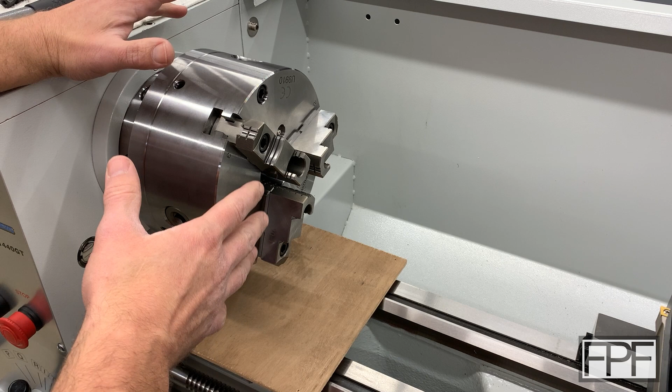And I need a 4-jaw chuck for the job I'm going to do on the lathe today. And I'm dreading changing the chuck out because every single time I've taken a chuck off this machine or put a chuck onto this machine, I have gently scratched the spindle nose on the lathe itself. You see, this chuck is interchangeable, and it aligns with the spindle on the lathe by a tapered nose on the spindle back here. There are 6 studs attached to the back plate of the chuck that go into bores on the spindle, and then there's cams that draw it in onto that taper.

The problem is those studs are really close to the taper, and it is really hard to line up all 6 and get this guy on there without touching the taper on the spindle. And the worst thing is that taper is what creates the precision between the lathe and the chuck. So scratching it up is not great.

Let me pull this off and I'll show you what I mean, because I think I have an idea of how we can fix this with a 3D print.

Okay, so I've got the chuck off and I set it here on a piece of plywood. Actually, I keep this plywood underneath the chuck when I'm putting a chuck on or taking a chuck off, so if I slip and drop it, hopefully it doesn't damage the bedway on the lathe.

And you can see now what I'm talking about. So here's those bores, there's 6 of these that these studs go into, and you can see this half moon shape is what these cams are turning and pulling this guy in on. But look how close they are to this taper. There's hardly any clearance at all between where the stud goes in and where the taper on the spindle is.

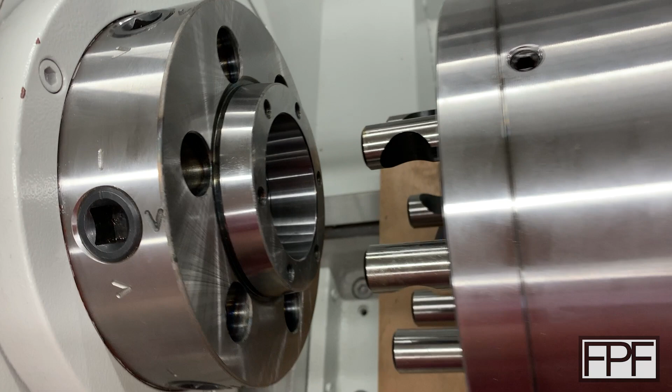In fact, in that very spot you can see some scratches that I've put there, hopefully. Yeah, I tried to stone it off with a precision ground stone, so there's nothing raised there anymore, so it should be okay. But you can see that's what's happening.

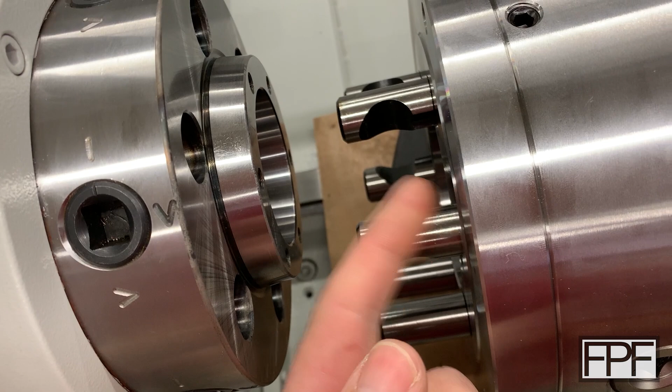And the scratch is right there where the hole is, because it's really hard to line up all these studs and get them into these bores without any of them touching the spindle. Because remember, they go all the way around, so it's not like I can be way high on one and then slowly come down into the bore. If I'm high, the ones at the bottom are going to contact the underside of the spindle taper.

So this wouldn't be so bad if the chuck wasn't really heavy, and this one actually isn't too bad, but the 4-jaw is incredibly heavy. In fact, let me go grab a scale. Let's weigh these chucks and see how heavy they are.

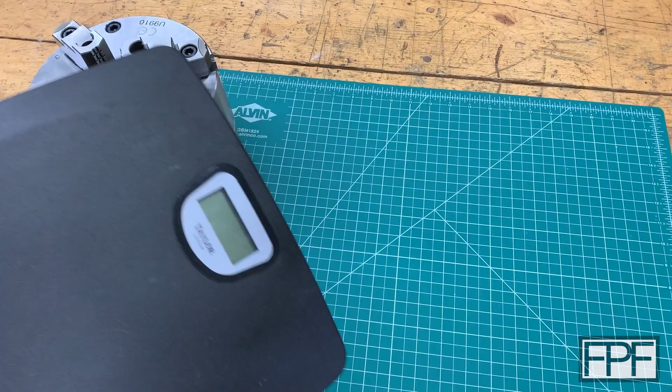All right, hopefully if I set the scale sideways here, you guys will be able to read the display, and I'll still be able to get something onto the scale. So this is the 3-jaw, an 8-inch chuck, and I don't think this one's too bad. It's still hard to hold steady up there. Okay, yeah, it weighs 47 pounds, so it's by no means light.

And I can lift 47 pounds, no problem. The problem is lifting it and holding it in a very precise fashion to get those studs into those bores without touching the spindle. The real challenge, though, is the 4-jaw.

Let's see what this guy weighs. All right, here's the big boy. This is the 10-inch 4-jaw. See if I can get that on there without blocking the screen. 68.4 pounds, so just shy of 70 pounds.

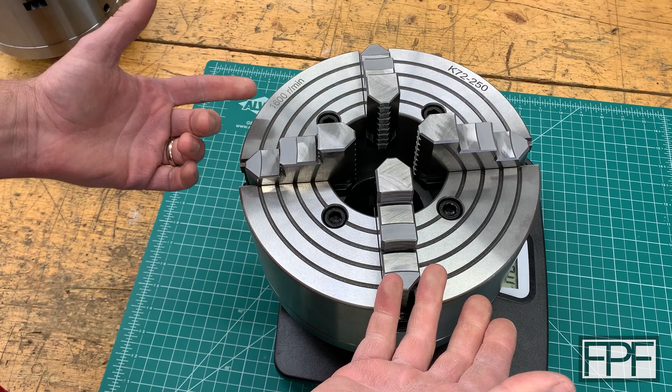And again, I can lift 70 pounds. I've gotten this on the lathe on and off 2-3 times now. The problem is holding it in a very precise location for an extended period of time. It takes like 10 seconds to get everything lined up and put in place, and then you still have to hold it. Even once it's in place, it's not going to stay there. It'll still fall out until you actually lock at least one of those cam lock studs.

So then you're trying to force it onto the spindle with your one hand, holding back that 70 pounds, and then trying to get one of the cam lock studs tightened with your left hand. God forbid you drop the wrench. Now you're taking this thing back off, lining it back up again.

It's a pain. I know a lot of shops, particularly on larger lathes, where it's not even remotely possible to lift the chuck and hold it in place to get it on there. They use an overhead crane or something like that.

I have a much simpler idea. I think we can make something that's going to line this chuck up precisely and make it a lot easier on the back to get these things on and off. Let's go back over to the lathe, I'll show you what I mean.

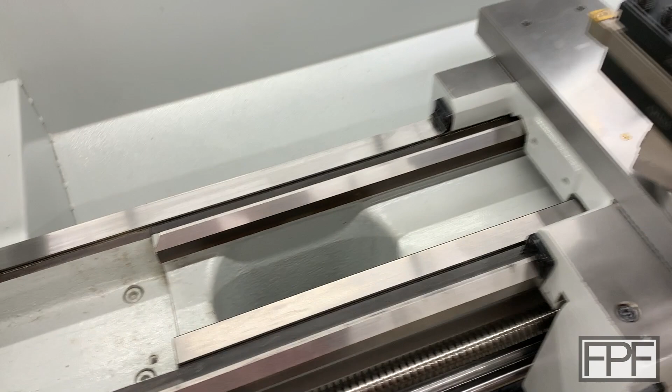Okay, so the lathe has these precision ground surfaces on it that the carriage rides on and that the tailstock rides on. If you notice, the tailstock uses the inner one, so this V here and this flat here, and the carriage uses a flat over here and a V out here.

What if we design and 3D print something that uses those same ways? So maybe this flat one back here, because these, by the way, the tailstock one does not go all the way. It stops shy of getting up here to where the chuck is going to go. So really that's out of the question, we can't use that.

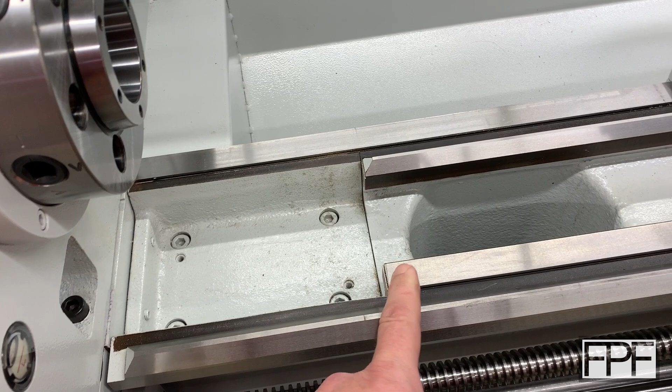But the other set of ways goes all the way to the headstock on this lathe. It does that because, I guess, if you're cutting really close to the spindle, maybe turning between centers, the carriage has got to be able to get all the way over there. So what if we use those?

What if we design something that slides on those, that is the perfect height to come over here, just set the chuck down onto, and then slide it into position? It's obviously got to be dead on, but I think we can get pretty darn accurate with a 3D print, even one this big.

I mean, this is going to be a big print. That's a fair amount of height between. Well, let me grab the tape measure, let's see what we're working with here. Maybe actually we can't do this. Let's check measurements first.

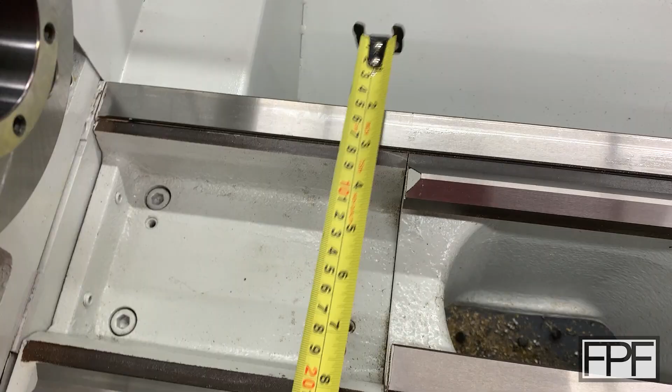Nah, we're good. We're well within the build volume of actually all of my 3D printers. This is going to need to be at least 7.5 inches across, or under 200 millimeters. So we're good, we're going to want to run a little bit past probably, but we're still good. And vertically, we're nowhere near running out of space.

So it's not like we need to actually go all the way to the center of the spindle, but even if we did, that would still fit.

So, all right, we're going to need a bunch of measurements to be able to make this even remotely precise. We need to know, in relation to the center of the spindle, exactly where this V sits and exactly where this flat sits, in at least two-dimensional space. Not necessarily three-dimensional space, but we need to know all of the distances to be able to relate these faces to the center line of this spindle to do this.

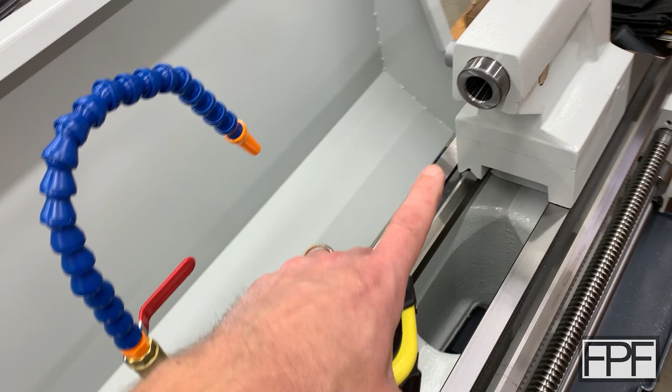And actually I think we can cheat a little bit, because the exact center of the tailstock should be the same as the center of the spindle. So we can put a pointed center here in the tailstock and probably take our measurements from that. Let me grab a center, I'll show you what I mean.

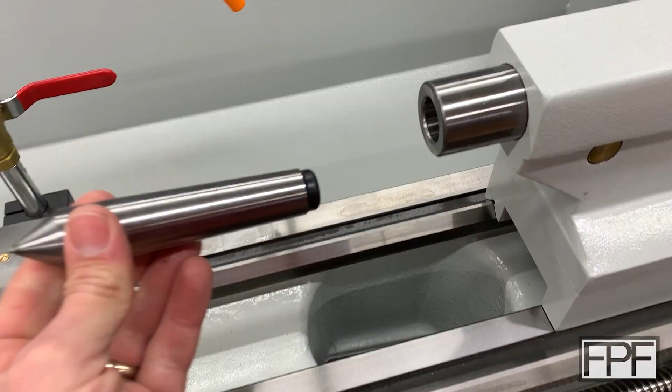Okay, yep, so now we can take all of our measurements on this end. It's going to be a lot easier to measure from this side. And we just need to figure out, this represents the center line of the spindle now, the point on the center. And we need to figure out what that is in relationship to all of these other surfaces.

And I think we'll draw all those in CAD and then build our design from that. Maybe do a test print to make sure that we are actually at the center point of the spindle first. So I'll spare you watching me take all these measurements, because I'm not even sure how I'm going to take all these measurements.

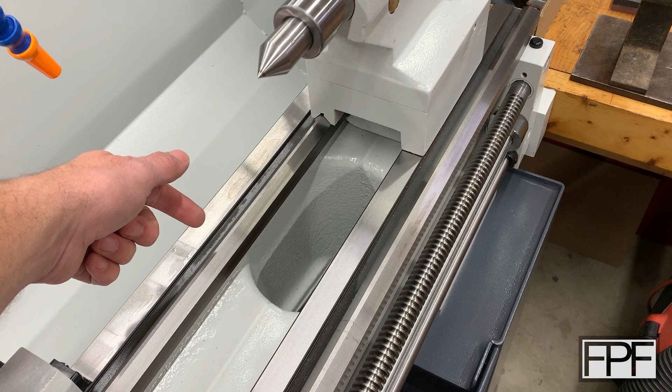Probably have to do some sort of precision block stack up from maybe the flat on the lathe, and same thing from the top of the V, maybe. There's a small flat here on the top of the V, and I just get the dimensions of the V from that flat. I'll figure it out and bring you guys back once I have all the measurements and get a start on this in CAD.

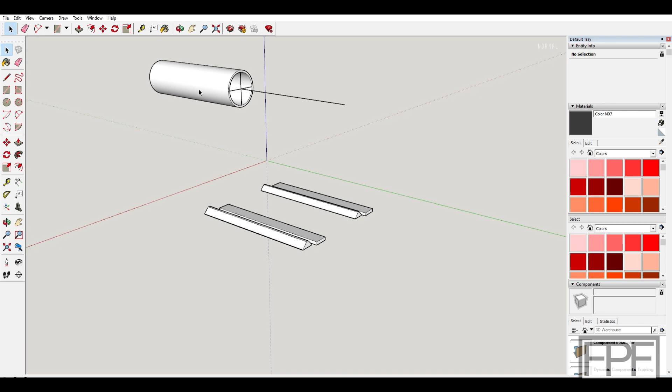All right guys, here's where I'm at with this. It probably doesn't look that impressive, but remember what we're trying to do at this point is establish the precise distance between the center line of the spindle on the lathe, and this is meant to represent the spindle. This line here on our green axis represents the center line of the spindle.

What we're trying to do is capture in a very precise way where each one of these precision ground faces is in relationship to the center line of that spindle. So I actually drew both sets of ways, both the inner one that the tailstock rides on and the outer one, because I used the ways in the center to establish some of the measurements and then measured from these faces to these other faces in at least one instance.

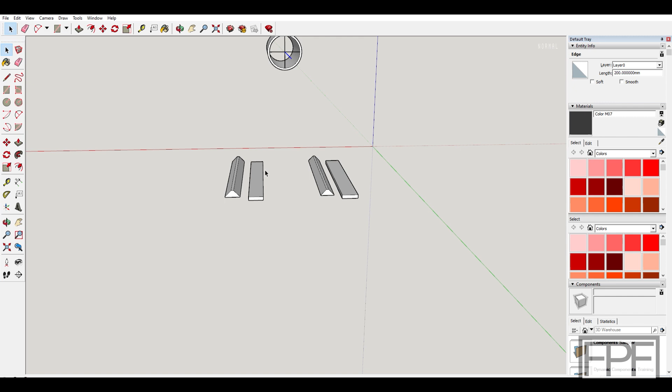I forget, kind of turned around here which way is which, but for one of these I had to stack blocks. Oh, I know what it was - I stacked blocks between the two flat surfaces, measured from the edges of these to get their position in relationship to the center line of the spindle, and then just took a set of calipers and measured from the edge, like this edge face here, over to the edge face on our V-way.

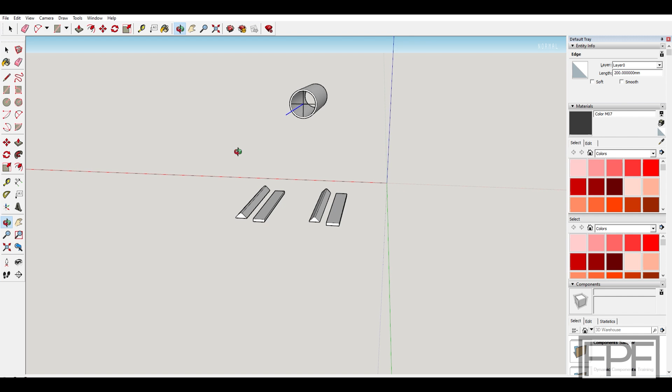And then I measured with a piece running across the top what the height difference was between the flat on the V-way and the flat face of the flat portions of our ways. So at this point, I'm confident that it is at least as good here in CAD as I measured it, but I think the next thing to do is actually print a test piece and just kind of see where we land.

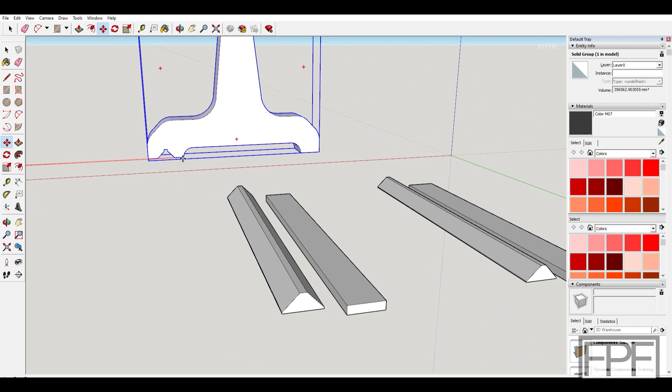So if I unhide here, I've got a test piece, and I will bring this over. Let's see if I grab onto this piece down here and bring this over so I can give you guys an idea of what I hope we're going to be able to do. I'm going to print this, and then I want to be able to bring it over to the lathe - it's not exactly on there, but you guys get the idea.

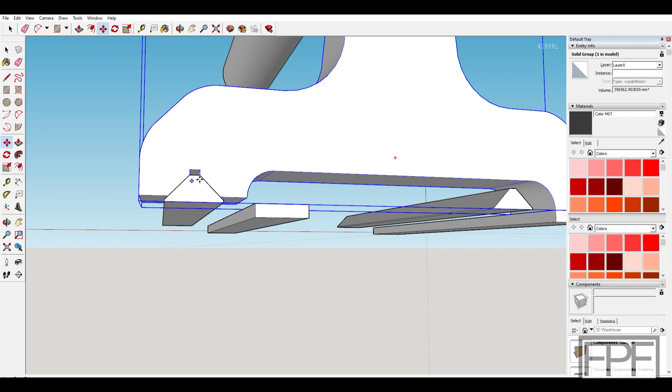This piece should sit on this V-way, and I have a notch up here in the top just to make sure that we are not contacting on that top face at all, which is going to throw off our measurement, because we want this to rest on the faces of this V, and then our flat on this way over here. And I've got clearance to make sure that we don't touch this V-way here.

And if we're dead on, we should be able to bring this small hole up here in our test piece over to the center line of the lathe, and it should line up perfectly. So I am going to print this test piece, and you guys will see me back at the lathe.

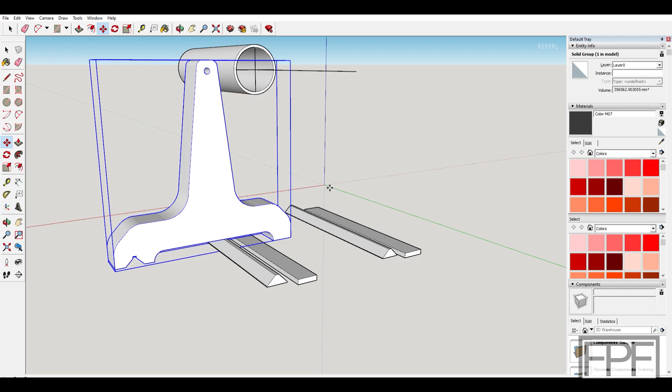All right, and here is our test piece fresh off the printer. Let's see how we did. Got that backwards - we need the V on this side. Let's see, does it even fit on here first? Yeah, that looks good. Probably should have gone a little bit taller with this because it's kind of rocking around a little bit.

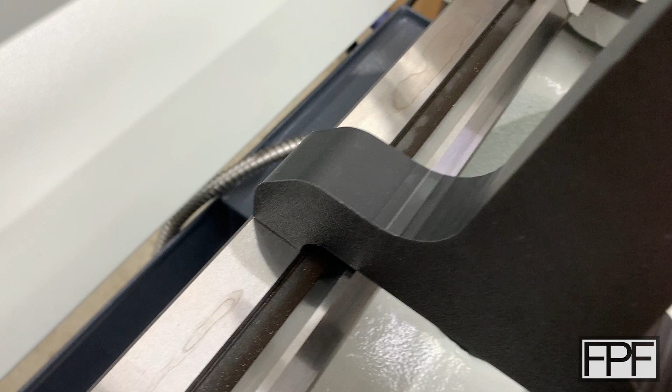If I push down on it, it seats on the - yeah, there we go. As long as I keep downward pressure, it stays seated on that V-way. And we look like we're pretty close in the back, but this is what matters up here.

We are either dead on or we are really close. I've got it cranked up until I made contact, and I'm just trying to look around from every side. I don't actually see, we might have a tiniest little bit of gap on that side. I think everywhere else, it looks like we're touching.

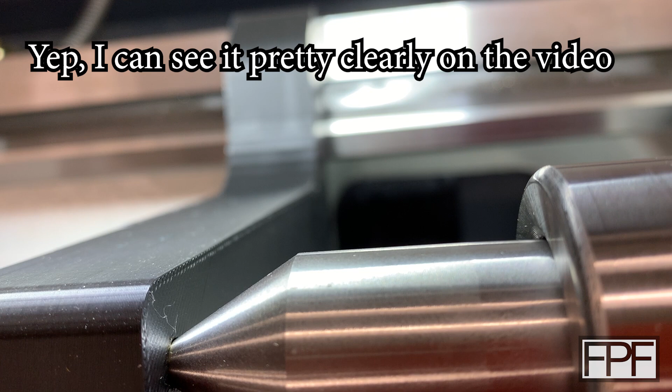Yeah, top to bottom, I would say we're definitely good. There might be the tiniest gap on that side. I think we have probably maybe 0.02 to come over in that direction, and we're dead on.

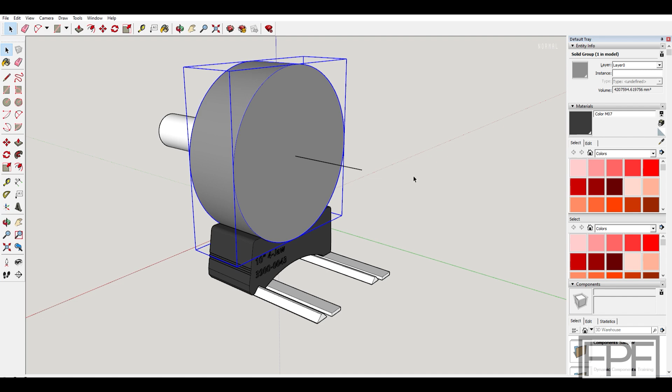So I'm going to make that adjustment and start on the actual design for the sled itself, and I'll bring you guys back. All right, so I have modeled just a cylinder here for an approximation of the chuck. There's really no point in modeling all of the details of the chuck. All that really matters is that we have the outside diameter accurate, and I have modeled a piece down here for our sled.

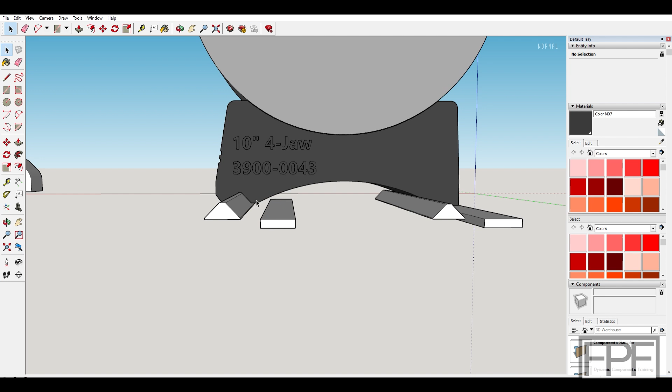I toyed around with a couple different options. What I ultimately decided was that having just a single arc coming across that cleared our center V-way was probably going to give us the highest amount of strength. Even though we have a little bit more room for material down here, I don't think it's actually going to add to the strength. I think that arc shape across and then dropping down just shy of where the V-way is probably going to be the strongest design.

So I did throw some lettering on here, and this is the model number of the chuck. I may end up tweaking that. I just kind of put that on there as a test, and I added some accents here on the side. There's no functional purpose of this, but I thought it set that front face out a little bit, and why not, right?

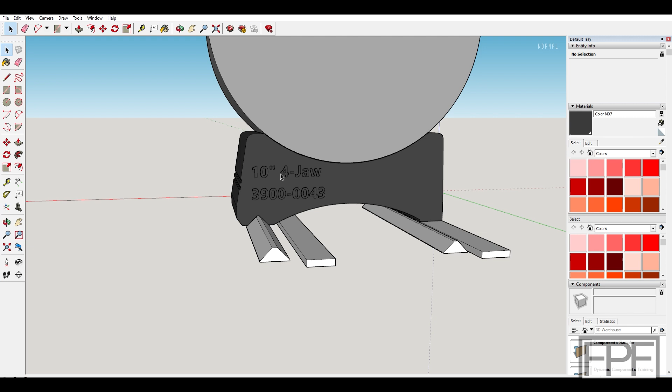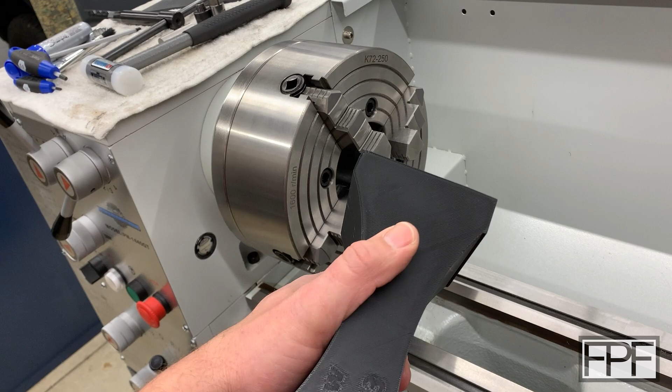So let's print this and see how it fits. Okay, I've got the 4-jaw chuck on here, and I'm sad to say that I think I did actually touch the spindle nose with 2 of the studs putting this guy on, but hopefully that is the last time. I've got our test piece for this chuck, and I'm not super happy with how the font came out on this.

I think I made a mistake in not printing that face down and doing it in 2 colors, like for example we did on the carriage lock. I think we're going to get better text if we do it that way. Also, it just seems a little big to me. It's readable, but let's see how this guy fits.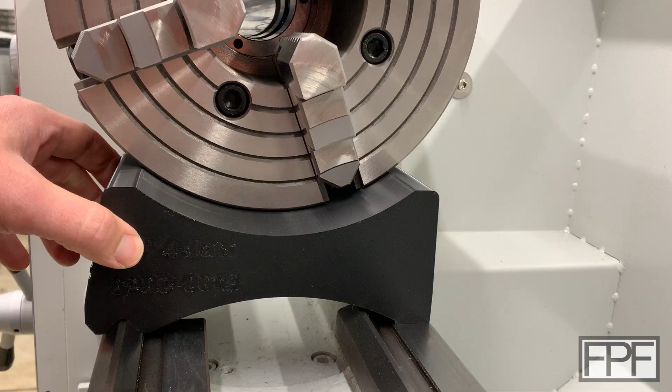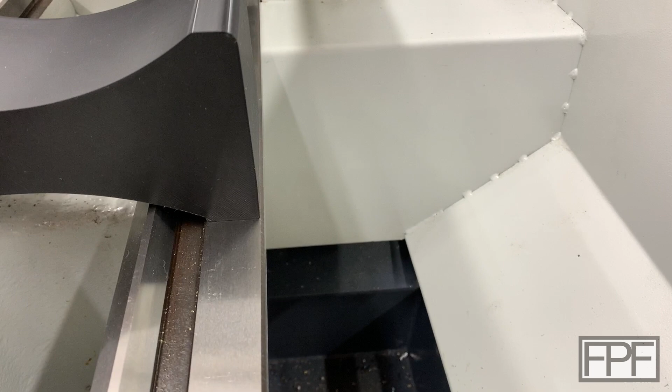Oh, that's looking good. Yeah, there is, I might reduce the size of the gap a little bit. I feel like if I slide this guy off of here right now, it's going to probably drop. I don't think it's going to drop down enough that the studs can hit the spindle, but I don't think they're going to be quite lined up. I'm also not happy with how we're actually just shy even of covering up to the edge of the bed, where there's probably like a 1/16 of an inch sticking out there.

I think we're going to make this bigger. We'll go just wider on this and maybe taper it down at the bottom. Maybe even go a little bigger up at the front. And I don't like the way the text came out. So let's come up with this to tighten up the clearance a little bit between the chuck and this surface here. Let's try out different lettering and let's make another test piece.

Okay, I stopped this one before it went any further because I really just want to see how our clearance is, and I really wanted to get this guy off the bed to see what the text looks like, and the text came out amazing. I like it this smaller size and in the two-tone, and with this as the face that prints down on the bed, that just looks 10 out of 10 to me. I am super happy with how that came out. Hopefully the camera's picking that up.

So let's see how it fits. Oh, yeah, I think our overhang on the back is much better now. Yeah, so I came up too high. That's okay. I kind of feared that might be the case, that maybe I was coming up a little bit too much. So I think I'm going to shoot for halfway between where the original one was and where this guy is. Yeah, actually, I can kind of force it under there.

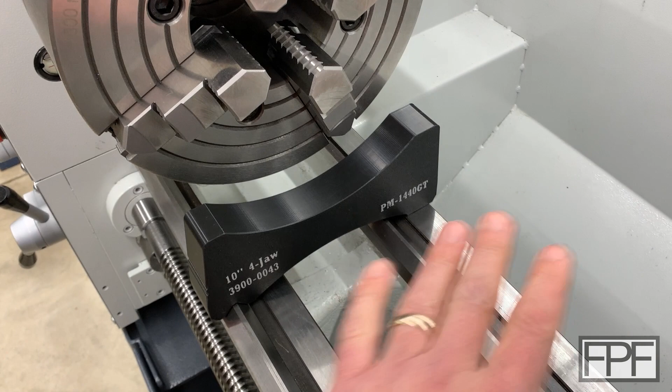I don't want to get it stuck. It just starts to go under, so I'm close. Again, I'm going to split the difference between the height of the first one and this one. We're not going to make any other changes because I'm happy with everything else. Let's see how we do on the third try.

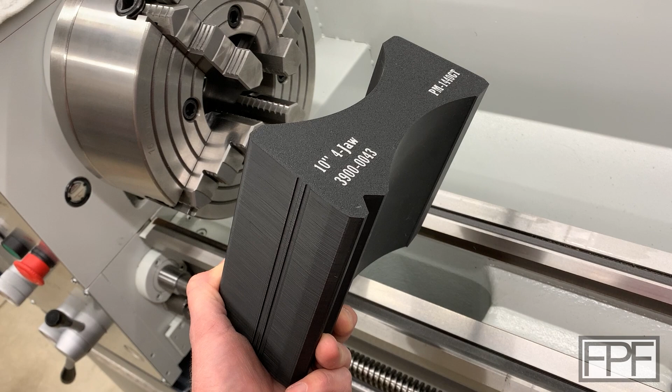All right, that was a crazy long print, but I am really happy with how this guy came out. This took just shy of 24 hours to print, I think it was 23 hours and 10 minutes or something like that. But it came out gorgeous. It's actually really quite heavy. This was almost a full kilogram of filament, but that's okay. I'm happy to spend it on this if this works, but let's see if it works.

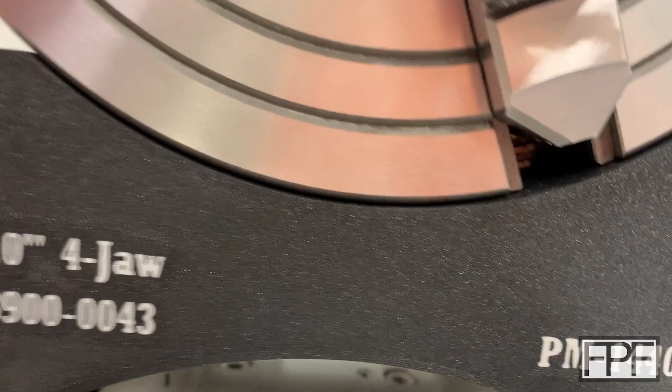I think we are dead on. I don't see any light underneath there. It barely moves if I try and rock it, like maybe a thou. But it does clear. I'm not hitting, and it's not rubbing either. Let's see, how's our width?

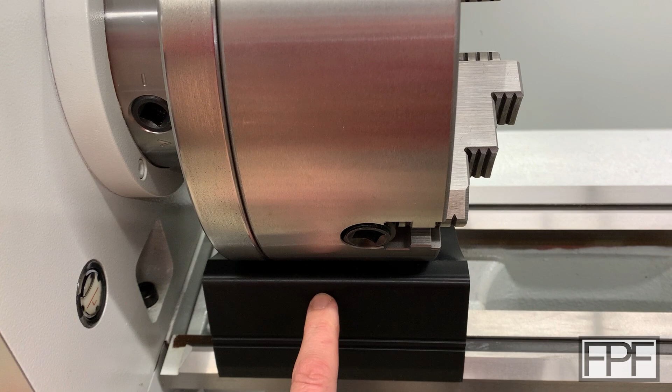So I ended up going a little bit wider, or I should say a little bit taller, since it was printed with this face down, than the chuck, which again took a ton of plastic and a ton of time to make. But I'm confident now that we have plenty of surface area here to land this chuck on, both when I'm removing it, as well as when I'm walking over to the lathe and setting this guy down.

So, moment of truth. Let's actually try taking this chuck off and see if this works. All right, I've got you guys set up directly between me and the lathe here. Hopefully I'm still going to be able to reach in and do this, but I wanted to give you guys a good view at how well this either does or doesn't work.

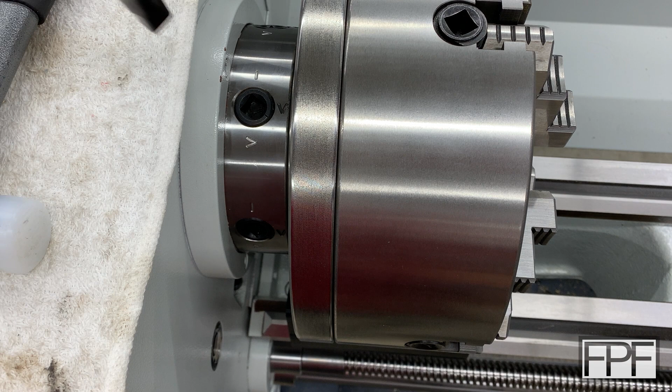So first thing we've got to do is unlock all of these cams, and there are 6 of these. So to do that, I am just going to drop our wrench in here, and these just turn until it kind of slides into a notch.

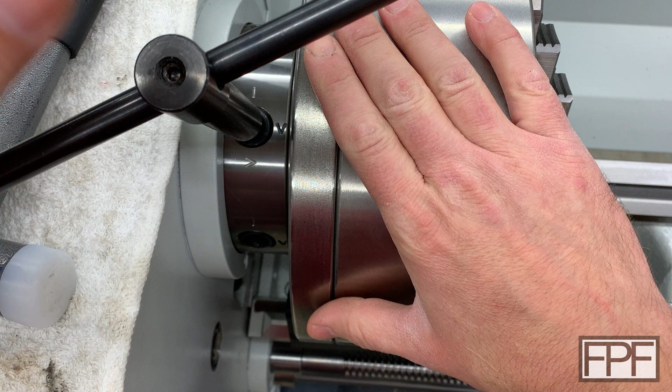Normally when I'm doing this, I'd be super nervous and I'd be absolutely standing right where I have you guys, because as soon as this guy loosens up, if it's not, sometimes it'll stay on the taper and I actually have to give it a knock with the mallet. But if it wants to fall off, there's nothing stopping it. Those studs are not going to keep it in place. It's just going to fall right down onto the bed of this lathe.

Now we have our nice 3D printed piece in there, which should basically play catch.

Oh, hear that scraping? We're actually hitting on our 3D printed piece now. It's clearing it, I can hear it scraping. I bet you one of these surfaces either has a little bit of a burr in it. Actually, this one feels like it has a little bit of a burr in it. Yeah, so one of these probably has a high enough burr that it's digging in, because there's nothing else sharp on here, and it sounds like something. Yeah, we'll see when we get it off, but it sounds like something sharp.

This might be the last one. Oh yeah, I could feel the chuck shift. So we have a slight gap opened up here now, but I didn't really see the chuck drop. Oh, that is like butter. Let me get you guys off the tripod.

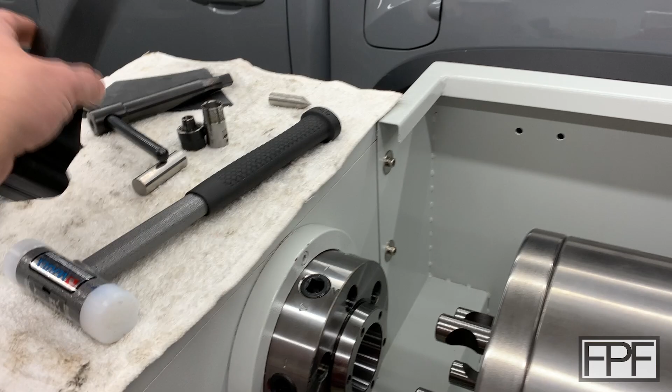All right, guys, I am really happy so far with how this is working out. I didn't see any give in this at all. I was a little worried about the sheer weight, 70 pounds of mass up here, how this would do supporting it. But I think, here's our test piece, you can see how dense we are on the infill and how strong this infill is, and we did 4 walls on this. I think I'm worried for nothing. I think the chuck could probably weigh 170 pounds, and I doubt this guy would actually have any give to it, especially over that distance.

It is a little hard to slide. If this was made of steel or cast iron with a little bit of oil on here, and there is a little bit of oil on here, this guy would probably slide even better. There is a little bit more friction between the plastic and these ways than there would be if it was metal. Now that said, that friction's not going to do any damage to our precision ground ways here, which is really what I care about.

If we ever actually wear this piece out, I can clearly just make another. But I just had a thought.

This is probably where I would position this, or maybe even a little further over, if I was walking over to the lathe with the chuck. But I don't even need to slide this guy over - I can do it one-handed. Let's see how hard this is to push. Yeah, it's actually not bad - it takes some effort, but it's doable even with just one hand.

But I think we could use the carriage to push it on. Once we're lined up on the holes, we can turn this. Let's move this so we're not lined up, because that's kind of like cheating - we know we just came off, so we know it's lined up. I'll shift this to high, to make it easier to turn.

Okay, so this is more realistic now. Let's pretend I walked up, set this down on here - we're not lined up over here. Let's bring the carriage over. You guys see what I'm thinking here? I bet we can force this over with a lot of control using this hand wheel. Let's see - we're gonna hit...

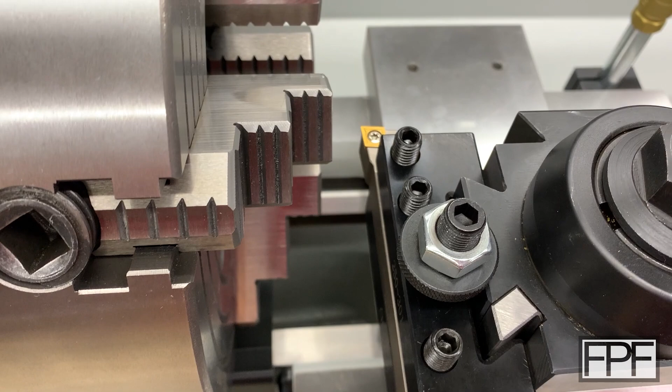I do not want to crash our carbide insert into the chuck. Nope, we're gonna hit down here first. Oh yeah, I can't, sorry. You get so much gear reduction in turning this, and you already have the friction of this sliding - I hardly even notice the difference of the carriage pushing this guy over.

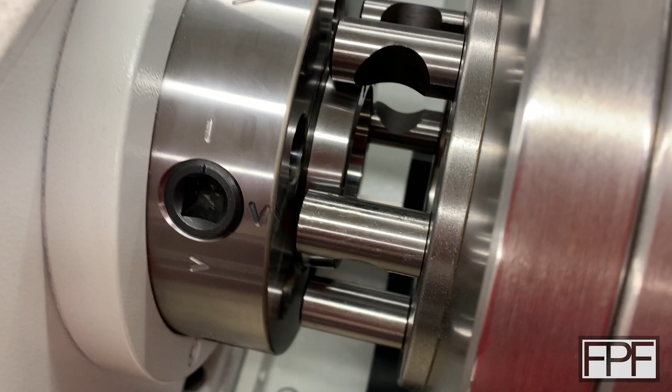Get close. Oh, that's a perfect check to make sure we're not touching that spindle nose. And if I line this guy up now, and then very gently... oh, look at that. Like it's meant to be.

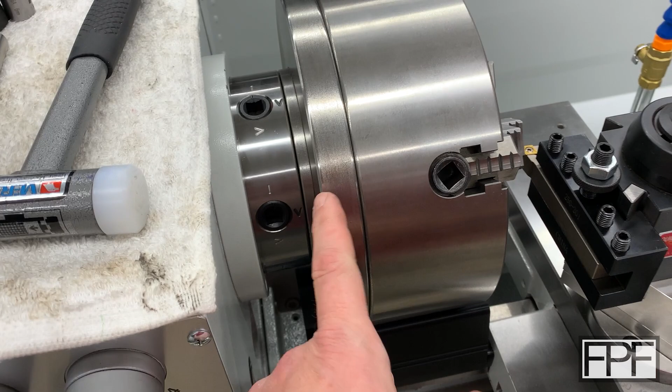Yeah, right on there. And now, the beauty of this is supporting it as well. I can take my time, coming around here, carefully grabbing my wrench for the cam locks on the spindle to actually draw this guy in, rather than standing here with one hand trying to hold the chuck onto the spindle and the other hand trying to turn at least two of these to keep it from falling off. Now I can back this off.

You can see we could just leave this chuck sitting on that sled all day long. So, we're almost done, because this is the chuck that is super heavy, and it's almost impossible for me to get it on or off without hitting those studs against the spindle nose.

But I do want to make one for the 8-inch 3-jaw chuck as well.

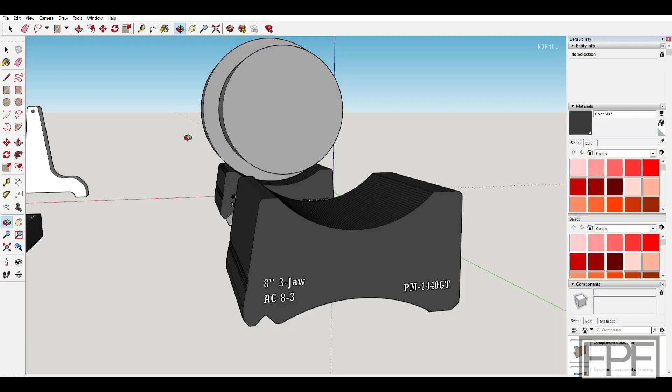All right guys, might have gotten a little carried away - pretty much filled up the whole screen here with pieces. Not only did I design the sled for the 8-inch chuck with pretty much the same parameters we used for the 10-inch, aside from the difference in OD of the chuck, but I also designed sort of a tray piece - just a blank with a little bit of an inset here.

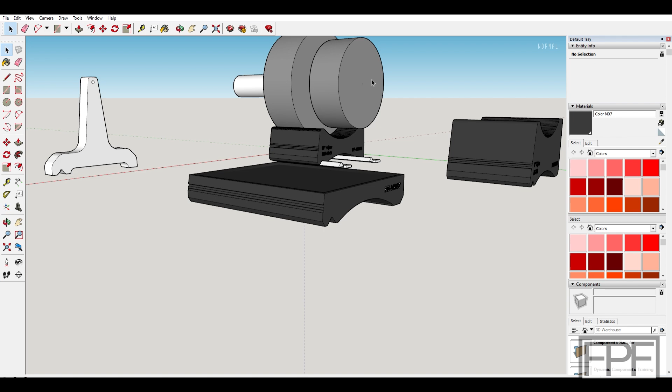What I'm thinking is, once the chuck's already on the lathe, I can set this down on the ways, slide it over underneath the front of the chuck, so that when we're chucking in large pieces of material, we don't risk dropping them on the bedways either. It might also make a neat tool tray down there for complex setups.

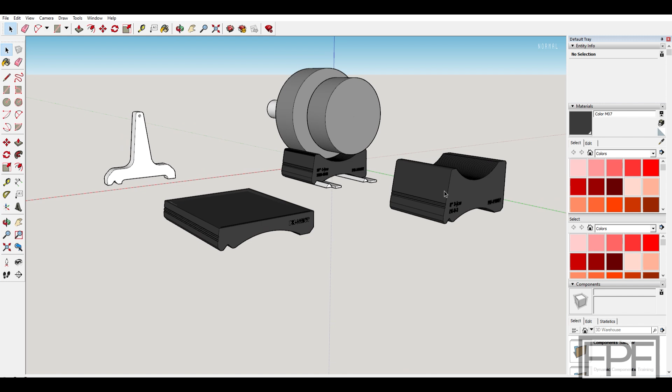Maybe for using collets, it's just a nice place to set down the different size collets and wrench as we're working, then pick it up and set it down on the workbench, and bring it back when we're ready to swap out the collet size, or flip the workpiece around. I'll print both of these and meet you guys back at the lathe.

All right, so our 8-inch one is done and it looks beautiful. I want to get the 8-inch chuck on here to test it - really we can use this to put the 8-inch on and make that our test. But I just carried the 10-inch chuck off the lathe and you can see there are scratches on here.

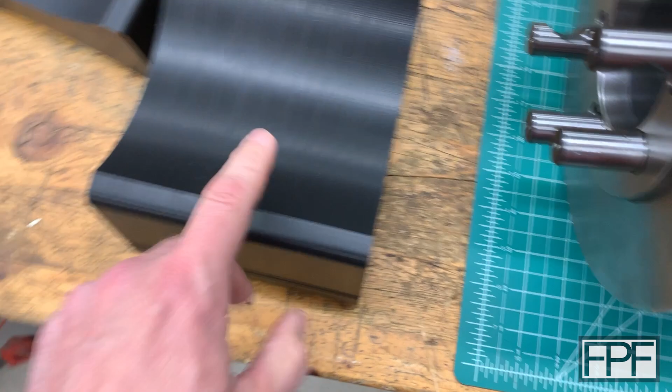I think there's just a raised burr on the chuck over here, so I'll have to go with a file just around on these corners. Yeah, this one's definitely got a raised spot right there. There's probably a raised spot on all these, and one of them is just high enough to scratch this one as it comes around. It's cosmetic, not going to do any harm, but I would like to resolve that if I can.

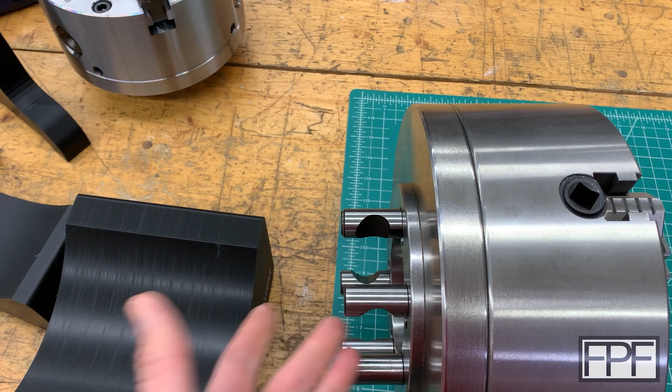Something I noticed carrying the 10-inch chuck over here: when I would pick this guy up to put it on the lathe before, I couldn't have a hand back here, because if I have a hand back here, there's no way for me to actually put it on the spindle. So I was having to pick this up with one hand underneath a chuck jaw and one hand kind of underneath. Now, because we're just picking it up and setting it down on our sled, it's a lot easier to carry this, because I can put one hand still under the chuck jaw and one hand right in the back of the chuck like this. So it's way easier to carry. I didn't even think about that when I did this.

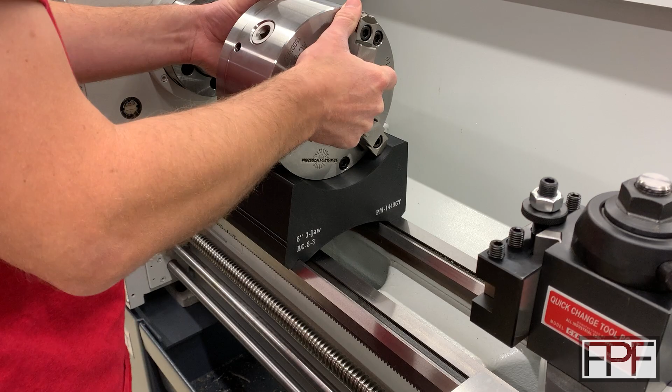All right, what do you think? Are we gonna be 2 for 2? Bring the carriage over. It's a little hard to see the lineup - you guys are kind of in the way.

Oh, look at that. And right on. I can back off the carriage now.

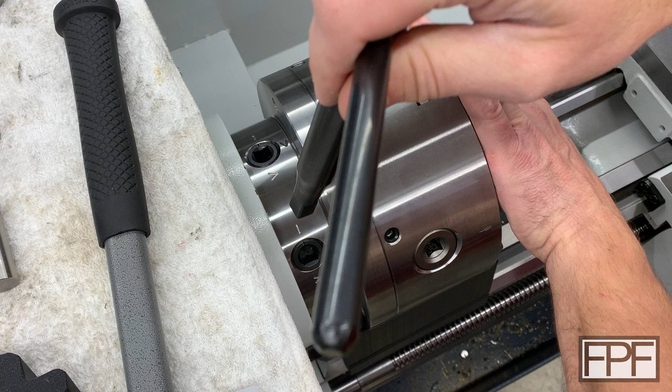I guess the true test is going to be once I lock these. Just lock 2. Oh, I can already tell we're not hitting this, so I'm answering my own question here already, which is: can we slide this out once the chuck is in place? 2 is enough to hold it.

Oh yeah, no problem. But I already know there isn't any extra play in there because this guy pushed right on, no problem. All right, that leaves us with one final thing to test, and that is the tray that I also designed. This guy came off the printer super nice.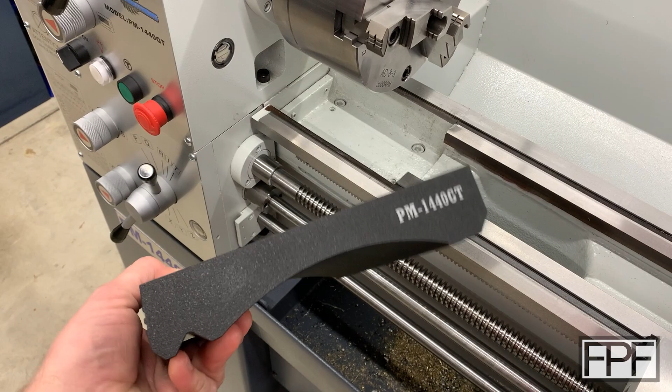Really happy again with the lettering on this. The only thing that disappoints me on this one is I should have gone deeper with the tray, this recess here on the top. I was afraid of thinning out this cross section any more - I didn't want it to be weak. But holding it in my hand and seeing it, I definitely could have gone probably at least a quarter inch deeper with that inset and we would have been just fine.

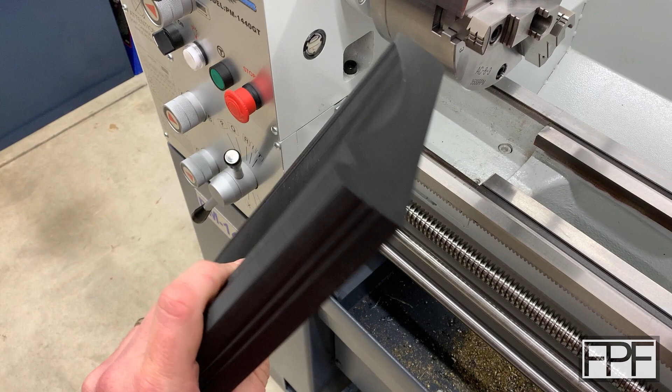This is printed, by the way, at the maximum build volume height of the X1C or P1S. And it could do with being a little bit longer. I think it's going to be okay.

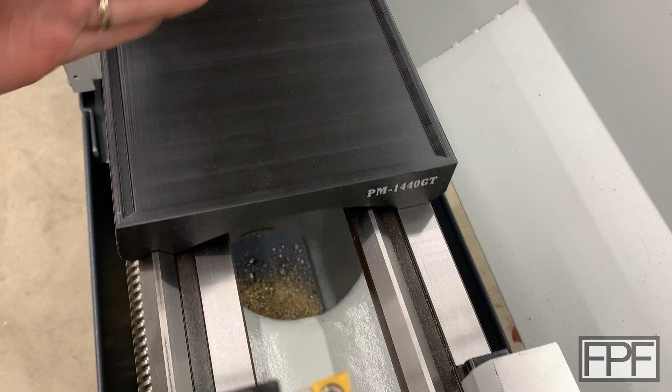So if I drop this guy down on here, first of all, our fit is very good, which I would expect. It just follows the same design as the sleds for the chucks. And we've got plenty of overhang to protect everything. But I would probably position it right about there if I was chucking a part in here. And it's decently long - if I had the build volume, I'd probably go another 2 inches, maybe even 3, just to make sure everything on the lathe was covered and protected while I was chucking a piece up.

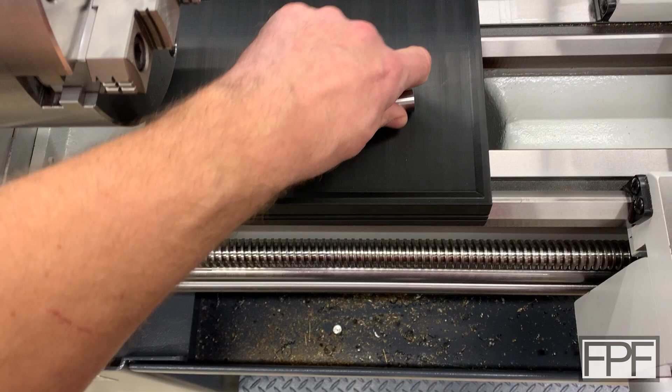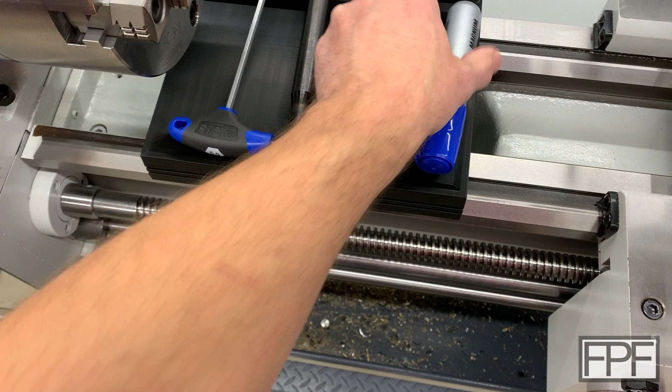And it sort of acts as a tool tray as well. Well, so that's a little big, but for other smaller pieces, particularly things that roll around, they're not going to roll off of this like they would just a piece of plywood. So if I had a couple things up here while setting up, none of these things, again, are going to roll off of here because we do have that lip.

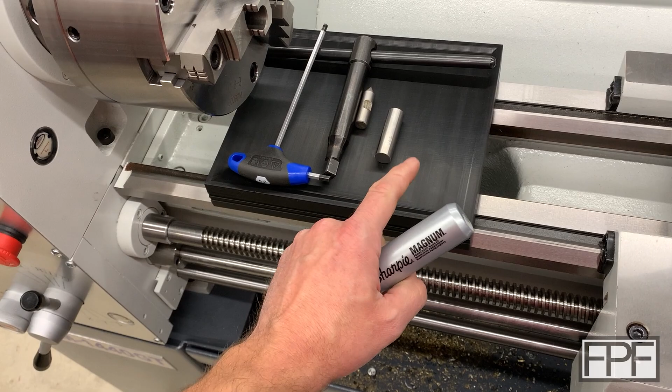All right, well, that guy might. So that's something - I might actually reprint this with slightly taller walls on this, but overall happy with this piece as well. And this one, even though it's a smaller print in volume from this end, because of the height, this was a full day as well. Every single one of these parts took a full day to print, with the exception of the test pieces - but the full size 10-inch sled, the 8-inch sled, and this tray each took 23 hours and some odd number of minutes to complete.

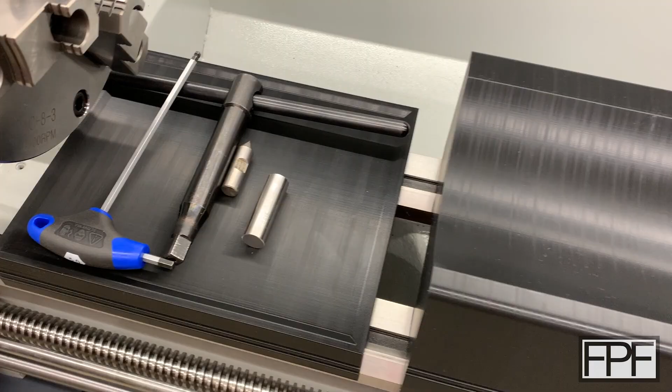Well guys, I am super happy with how these came out. This 100% solves the problem I had with getting chucks on and off this machine without damaging that spindle nose. It's also made it easier to carry them over to the lathe and off of it, since I'm not stuck having one hand underneath the chuck and the other grabbing one of the jaws.

Now I can grab it through the spindle hole or through the through hole in the chuck on both ends, walk over, set it down on that nice firm surface, and then push it into place with the carriage.

So what else are we missing here? Obviously we've got a tool tray that also acts as sort of a protective piece when we're chucking work into the lathe and taking work out. We've got sleds for each one of the chucks that I have on this lathe. What else are we missing? What else could we leverage the dimensions we have here to quickly make some other accessories for this lathe?

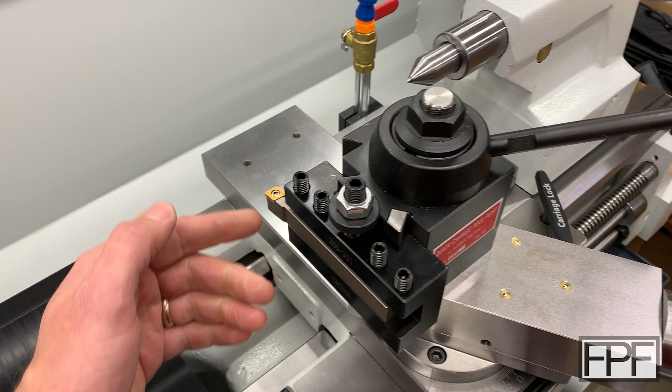The one thing I did have in mind is for setting tool height. On a lathe, you want the height of the tip of your cutter to be exactly in line with the center line of the spindle. I typically do that by just rotating this guy around on the quick change tool post and visually lining up the point of this insert with the point on a center in the tailstock.

And that gets it close. It's probably within 5/1000 of an inch, maybe even closer. But I know it's not exact because oftentimes when I'm making cuts, I can see that I'm not on the center line. I'll end up with like a little nub still sticking out of the material, even though I thought I was dead on.

But what if we had a piece that slid on the ways, came up above the center point, and had a dial indicator up here? You'd put your tool on, have it below the center height, slide that over to where the tip of the indicator was right over the tip of the cutting tool. We can change that position with this. We're not going to change where the indicator is since it's riding on the ways, but I can adjust the position of the tip on the cutter back and forth on this axis with this crank here.

So we get it to where the tip of the tool is right underneath the dial indicator, and then we raise this with the height control until maybe it raises the dial indicator a set amount, like 0.100 of an inch. And then we lock it down and we know that's our center position.